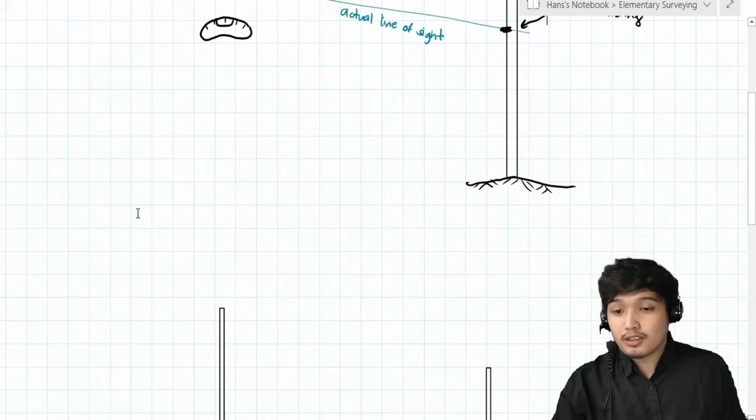There are two ways to do this two-peg test. So let's say we have 2 points, A and B. This is our first setup.

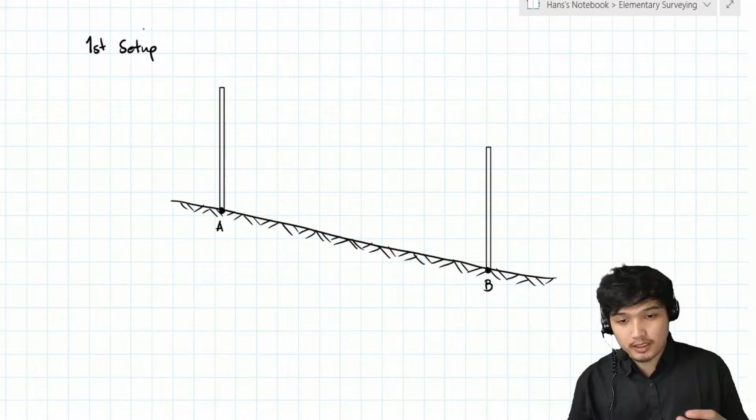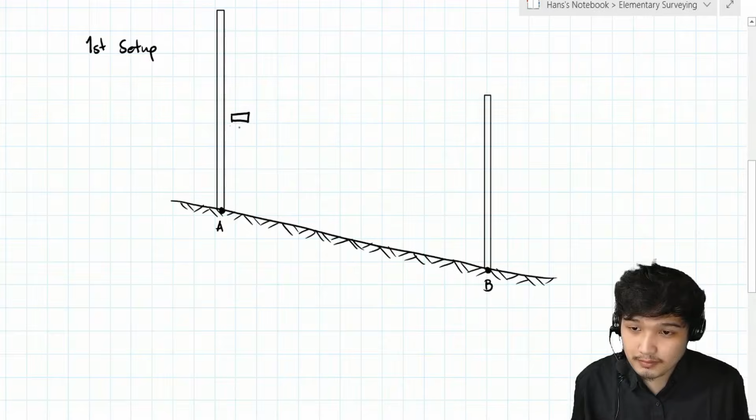In the first setup, the instrument will be positioned at two different locations: one at a distance near A and the other at a point near B. So let's say for example, this is our instrument, let's place it near A. Then, as we said, we do everything to make sure the line of sight of the instrument is perfectly horizontal.

So this is what we expect to read at the rod at A and then the rod at B, this is our expected reading. That's the thing though, because of the imperfection of the instrument, the line of sight is inclined by a certain angle theta. In this case, this is theta.

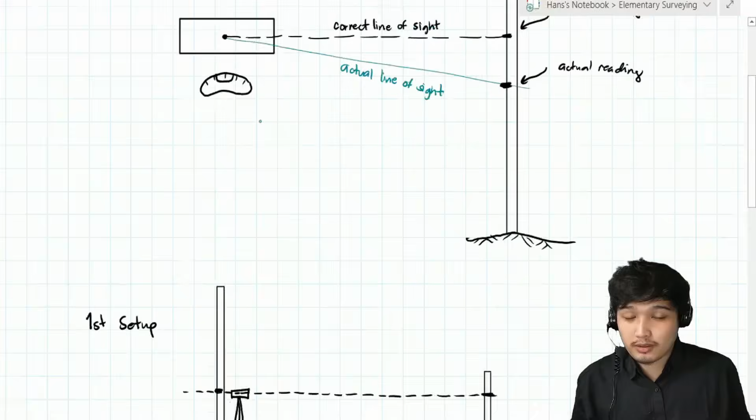That's very small though, so the error we encounter here is very small as well. The inclination can either be downward or upward, so let's just assume that the actual line of sight is inclined downwards by an angle theta.

So if we sight through the rod at A, this is what we measure, from the horizontal it's inclined by theta. Now, since the instrument is set up near A, if you notice, the reading at A will be almost equal to the correct reading.

So the actual reading in blue is almost equal to the correct reading using the broken line. So we can say that the error committed in the reading at A is approximately equal to 0 when the instrument is set up near A.

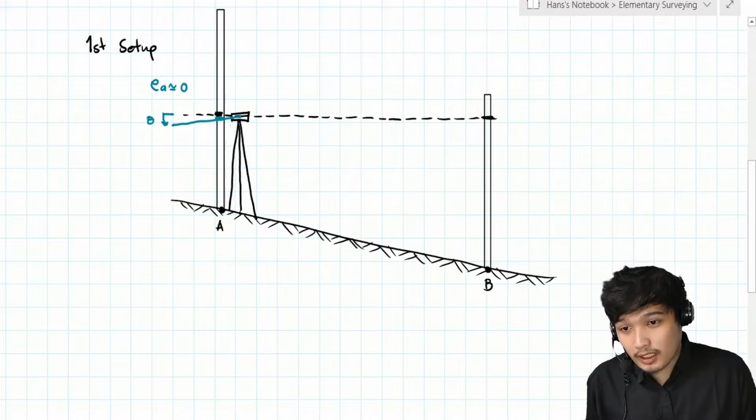So notice that from the correct reading, this is his actual reading. So he will commit a certain error. Let's call this his error at B. So with that, we can establish the relationship between angle theta and the error using the horizontal distance between A and B.

Let's say this is distance L. So approximately, from the instrument going to B, this is also L. So we can say that tangent of theta is equal to the error at B over the length L. That is when we set up the instrument near A.

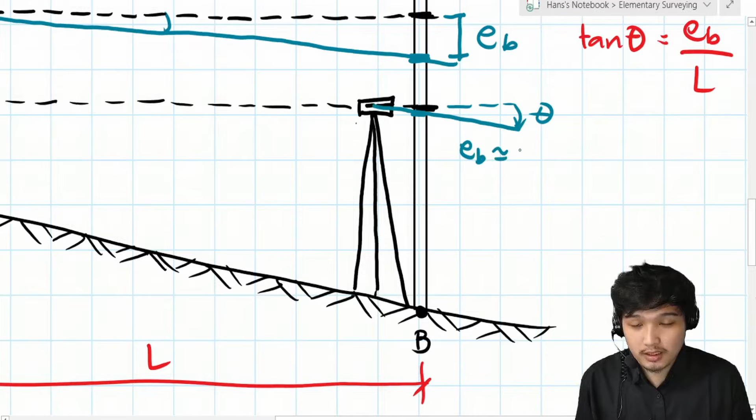So therefore, for the case where he is closer to B, the error committed at B is approximately equal to 0. While on the other hand...

He will sight point A, the rod at A. Because it's inclined by an angle theta, this is what he will read. So this is still theta.

So from the assumed correct reading at A, this is the actual reading at A. So he will commit an error, EA. Let's call this EA sub 1, EB sub 1, and this EB sub 2, EA sub 2.

Let's say this is the first setup, and this is the second setup. For the second setup, we can say the relationship, since this is still L, the relationship here is that tangent of theta is still equal to EA2 over the length L, since tangent theta equals opposite over adjacent.

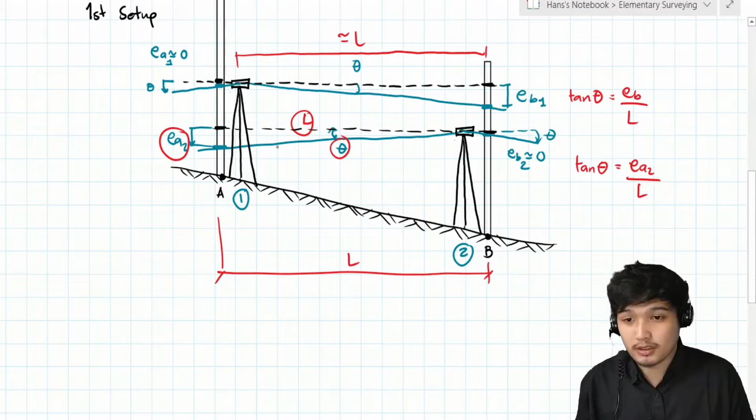Let's name this EB1. Since theta is the same, we can say EB1 over L is equal to EA2 over L, so we cancel. So we can say that the error at B at the first setup of the instrument is equal to the error at A at the second setup of the instrument. That is the relationship we can build which we will later use in our problem solving.

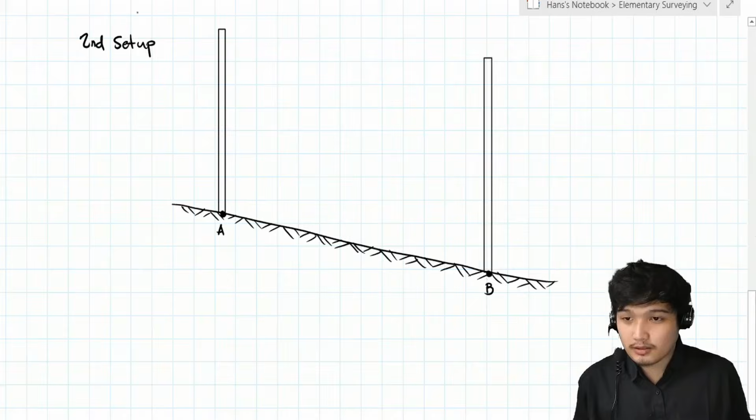So let's say for example the distance between A and B is L. Here, class, you don't need to memorize a formula because this is purely analytical. The discussion—if you understand how the two-peg test works, you won't need to memorize the formulas. So let's say this is distance L. The first instrument setup is placed exactly midway between A and B, so we place it here.

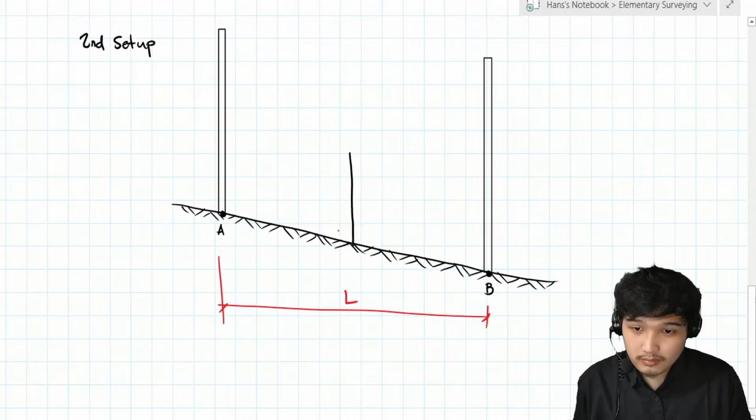Okay, so ayan. Ito yung correct horizontal line of sight. So dapat ito yung reading.

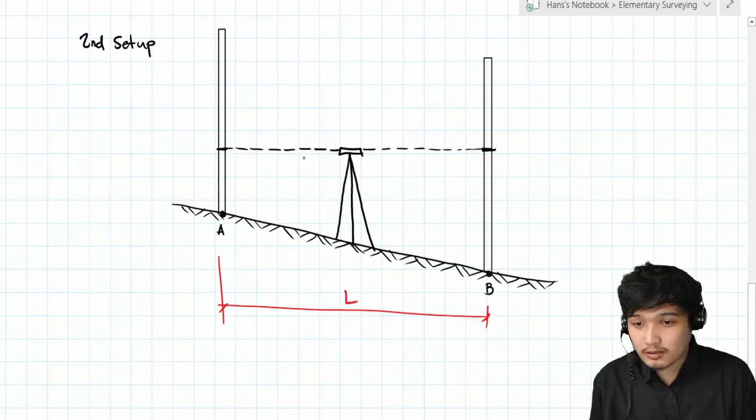Since the actual line of sight is inclined by an angle theta with respect sa horizontal, so kung mag-read siya sa A, ito yung mariread niya. Ayusin ko lang, ito yung theta, ito yung mariread. So therefore, ito yung error sa A sub 1 for the first instrument setup.

While for the B, using yung same instrument, ikot niya lang yan, inclined pa rin yan by theta with respect sa horizontal. Ito yung mariread niya sa B. So therefore, ito yung error niya sa B for the first instrument setup.

Theta. Ngayon, since nilagay natin siya exactly midway, so this one will become L over 2. So by tangent of theta, dito sa kabilang side, for the left side, tangent of theta is equal sa EA1 over L over 2. Dito sa kabila, tangent of theta is equal sa EB1 over L over 2.

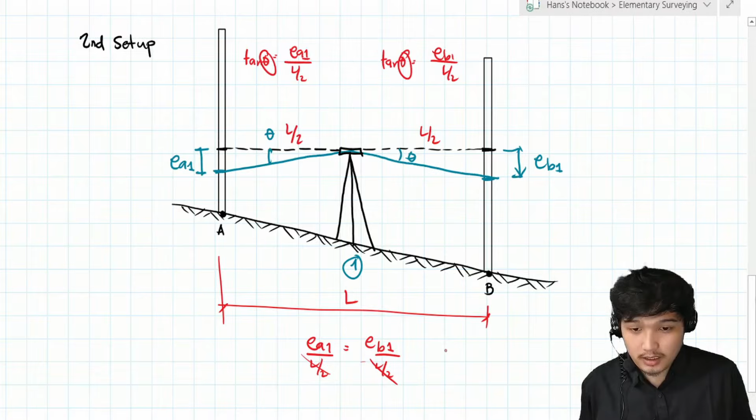Using yung relationship ng tangent of theta, since same theta lang yan, we can say that EA1 over L over 2 is equal sa EB1 over L over 2. Magka-cancel, so magiging EA1 is equal sa EB1. Yun yung first relationship natin.

So next, after ma-setup yung instrument midway between A and B, i-setup natin siya either dito sa likod ng A or sa likod ng B. Let's say dito siya ilalagay, sa continuation ng point A. Sinet up yung instrument behind point A.

So bibigay syempre yung distance na to, class, na with respect sa A. Or kung hindi man yan, basta magbibigay siya ng distance in order for us to locate yung position ng instrument. Let's say, class, ito is L1. Tawagin natin L1. Okay, so inaasahan natin na yung line of sight is horizontal.

Yun nga lang, class, dahil sa imperfection ulit ng instrument, so yung line of sight niya is inclined by an angle theta. So ito siya, so for A, ito yung correct reading, pero ito yung actual reading niya. So itong distance na yan ay tatawagin nating error sa A for setup number 2.

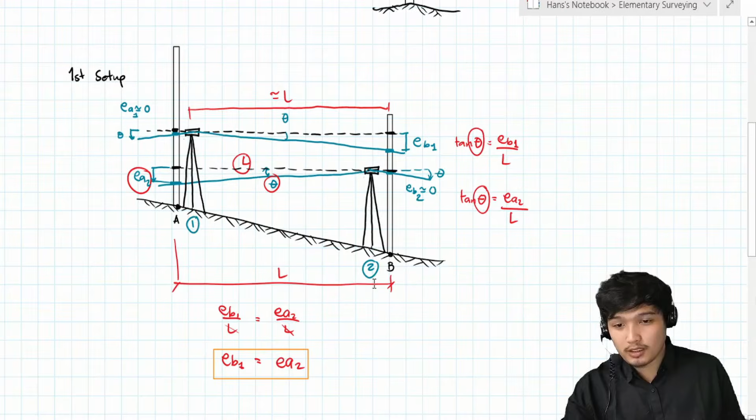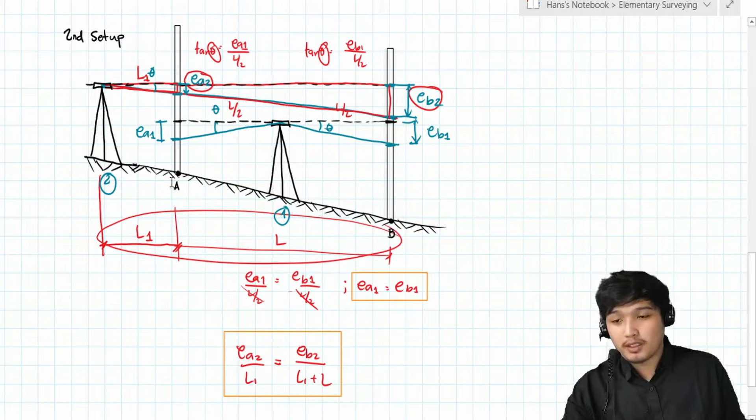So ito yung second possible setup, yung rod is set near sa point A or yung point B. So instrument setup 1, instrument setup 2, and then ito, so midway between setup 1 then setup 2, so somewhere along the extension ng point AB. So pwedeng behind A or behind B. So pwedeng ganun, basta ito yung relationship.

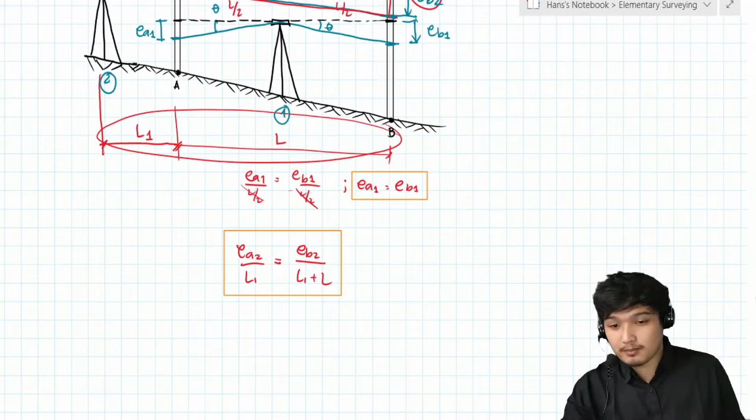So para mas magets natin siya, class, apply na natin siya sa ating sample problem. Okay, wait lang.

So situation 11 tayo, class. Sabi dito, in the two-peg test of a dumpy level, the following observations were taken. We have stations A and B, merong two instrument setups, that is near at A, saka near at B. So yung gagamitin natin, diniscuss natin kanina, is yung first setup.

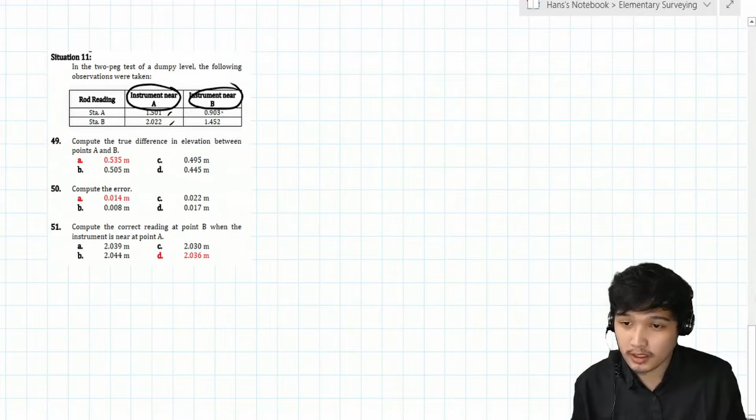Okay, so merong binigay na rod reading. Nung malapit siya sa A, so 1.5 and then 2.022. Near at B, 0.903 and then 1.452.

So class, determine or compute the true difference in elevation between A and B. Next, compute the error. And then lastly, compute the correct reading at point B when the instrument is near point A. So when it's near point A, what is the correct reading at B? Okay, let's solve that, class.

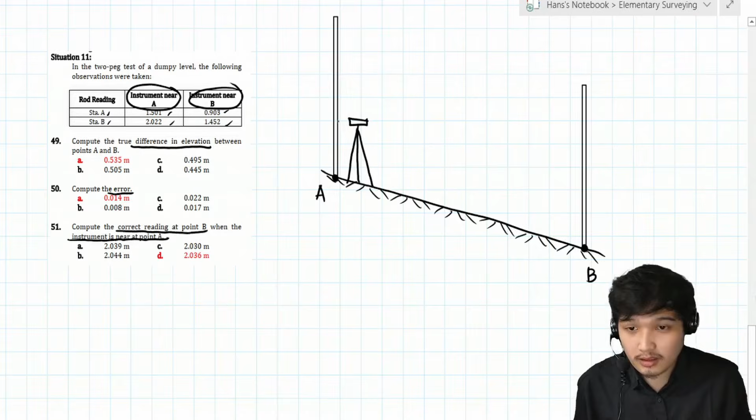So this is the correct line of sight, horizontal. This is what we should be reading, right? But because the line of sight is inclined at a certain angle, the question now is, what is the inclination of the line of sight? Is it inclined downward or upward?

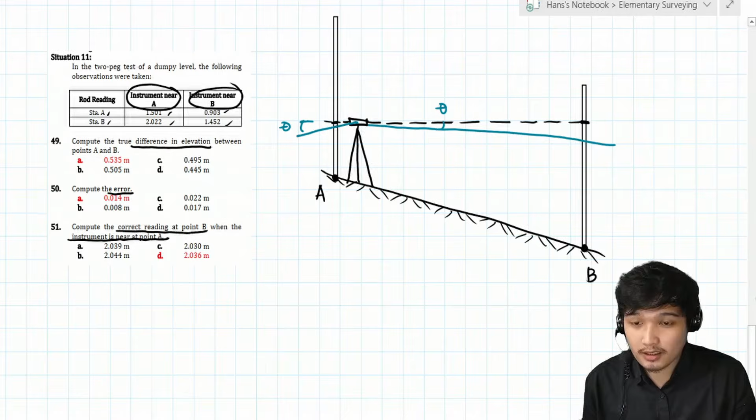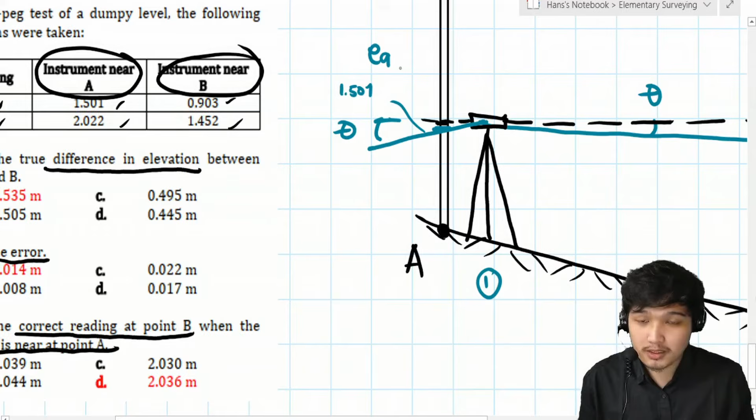Okay, so here, angle theta, and this one is angle theta too. So we can say that, now for the rod reading at A, what was read here, class? 1.501, right? So this one is 1.501, which we can say the error at A for the first instrument setup is approximately equal to 0.

While for the error at B, this is what was read. How much is this, class? 2.022. So this is the error at B, EB1. We don't have the answer for that yet. And given that the distance between A and B, the horizontal distance between A and B, is L. So L is here too, approximately equal to L.

So what was that again, class? Using L, theta, and EB1, we can say that tangent of theta equals EB1 over L. So we have two unknowns there, class.

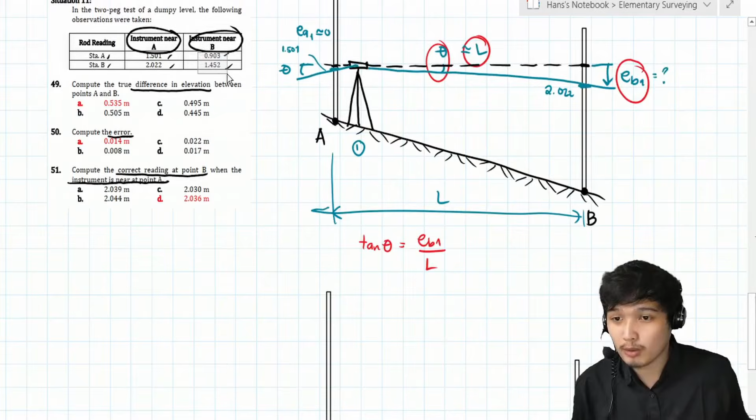So this is theta, again theta. So here's the reading, no correction here. How much is this? Reading at station B is 1.452. So this is 1.452.

Here, what was read is 0.903, with an error of this much, error A sub 2, which is unknown.

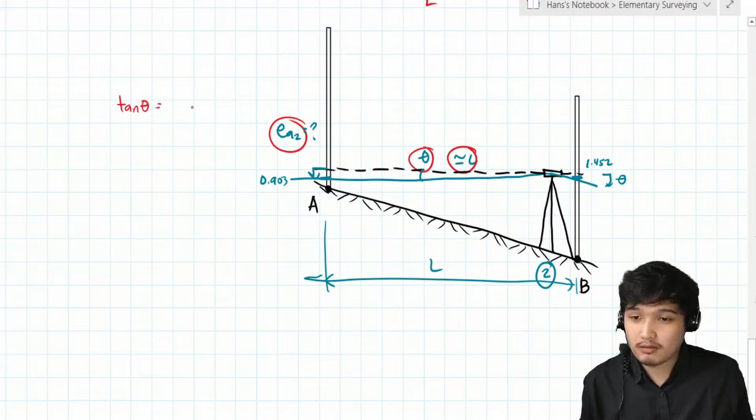Okay, so using trigonometric function, class, approximately equal to L. So this and this, so that tangent of theta equals EA2 over L.

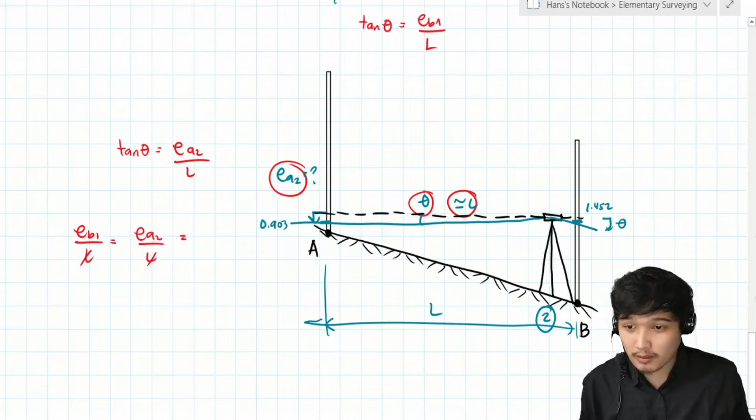Okay, so that's it. Let's go back to the relationship, class, EB1 over L equals EA2 over L. So we can say that the error is the same, right? We can just call it simply error E. Okay, so now, class, how do we solve what we're looking for? We haven't solved anything yet.

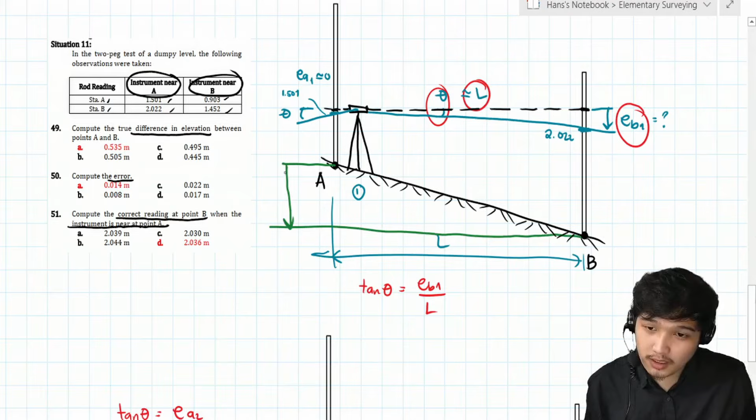is just look for lines parallel to that horizontal line, which is this, the horizontal line of sight. This one, class, okay, this is parallel to that horizontal line. So what we'll do, class, is take this height. How much is this, class? Isn't that 1.501? No, because there's no error, class. So, 1.501. Okay, how about the right side? How do we get that height, class?

Okay, paano kunin yung height na yan? So diba, etong mula sa reading papunta sa base, ito yung 2.022. How about ito? Ito yung error B1, no? So error B sub 1. So therefore, yung total height dyan sa right side is 2.022 and then plus yung EB1.

Dito sa left side, yung total height na ito, class, is H plus 1.501. So equate lang natin yan, class, no? Since same yung length niyan. So we can say that H plus 1.501 equals 2.022 and then plus EB1.

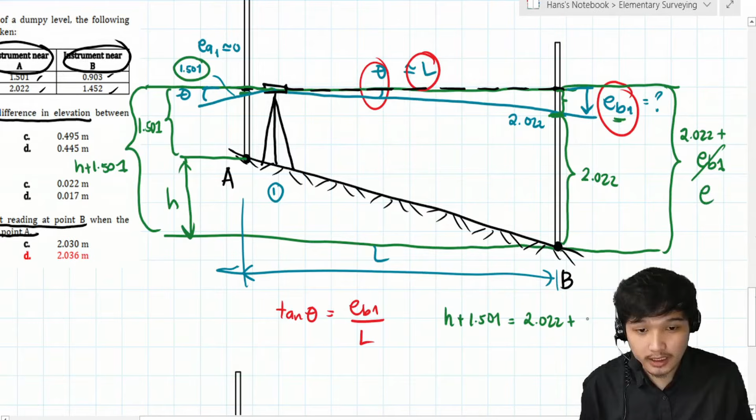Wherein etong EB1, di ba sabi natin, pwede na siyang i-consider as error E na lang, kasi nga same lang siya ng error sa second instrument setup. Okay, so nakagawa tayo, class, ng equation. Tawagin natin ito as equation 1.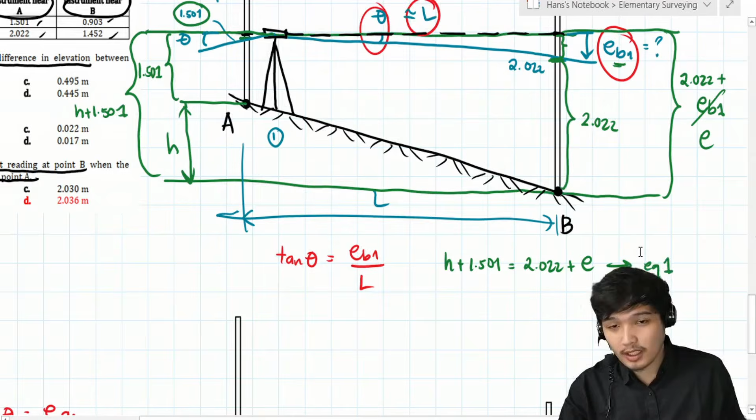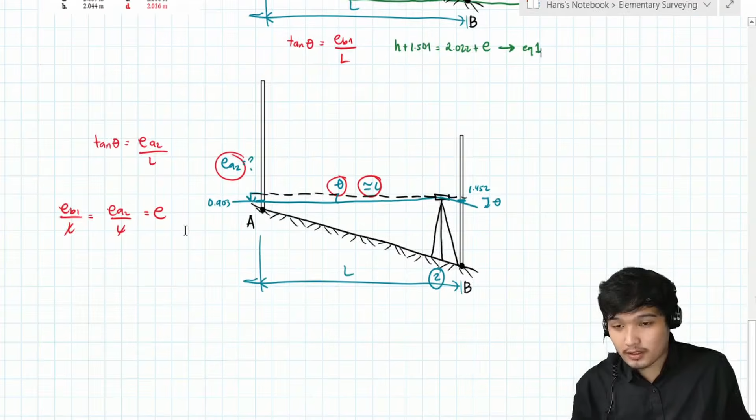So next, yung second equation, class, kukunin natin dito sa relationship ng height H sa anong error using yung setup number 2. Okay, so paano yan, class? Zoom in lang natin.

So again, ito pa rin yun, class, no? Ito, from A papunta sa B. So this one is the difference in elevation na H. Okay, zoom in pa natin further.

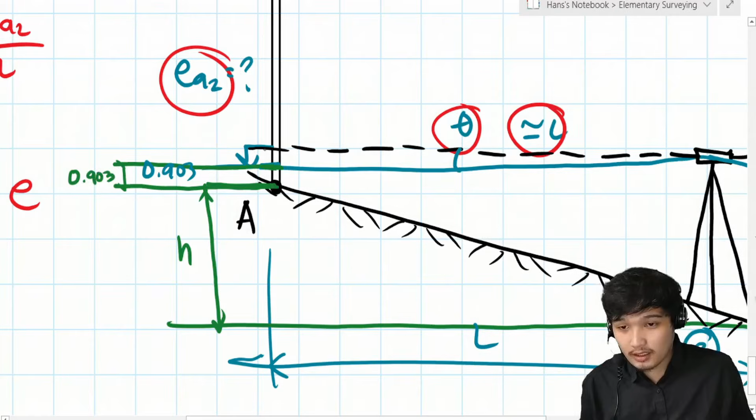So mula dun sa actual reading, tama, then papunta dun sa base. So this one is, ito nga yung 0.903, yun yung reading niya. At saka di ba ang gagawin natin, class, i-consider natin tong horizontal line of sight na to.

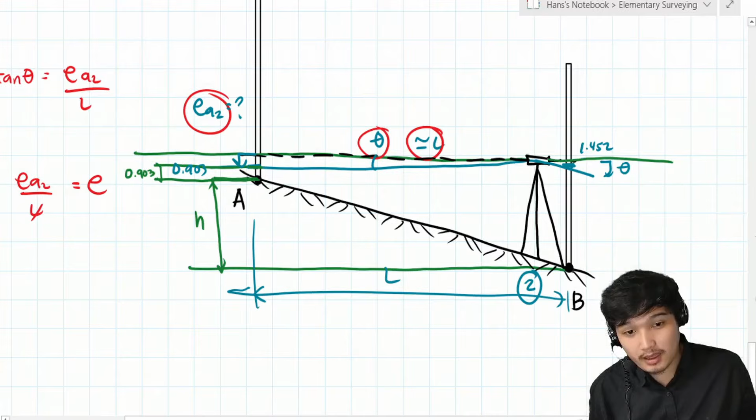So hindi ko pa pala napakita. Consider natin tong horizontal line of sight na yan para maka-generate tayo ng parallel lines. Okay, so balik tayo dito. So 0.903 ito, mula dun sa reading, papunta sa base. Next, from dun sa correct line of sight, papunta dun sa reading. Di ba ito yun, class?

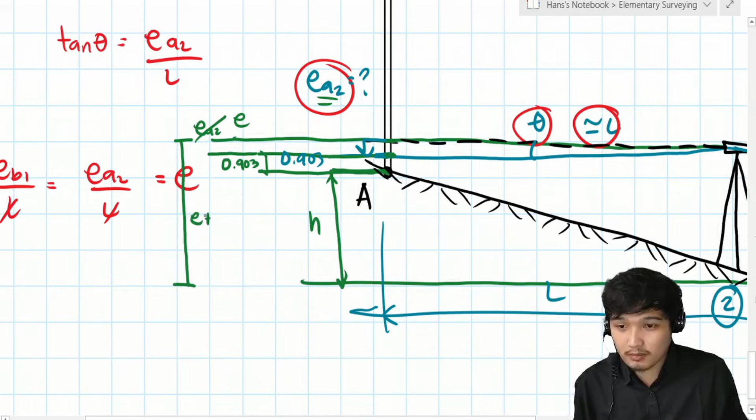Ayan, ilan yan? Di ba yan yung error? Etong error sa A2, which is pwede nga nating tawagin as error E na lang. So ibig sabihin, class, we can say that yung total height mula dun sa horizontal line of sight papunta dun sa horizontal line of B is what? Yung error E plus 0.903 and then plus H.

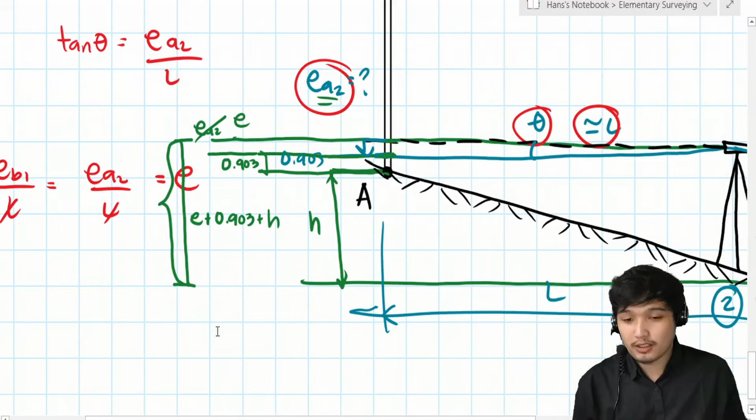Okay, sana na-gets, class. Punta tayo dun sa right side. So using yung mga dimension dito sa right side. Di ba ito yung reading, which is almost the same na dun sa horizontal line of sight. So ibig sabihin, reading papunta sa base, ito simply 1.452. So gets ba yun, class?

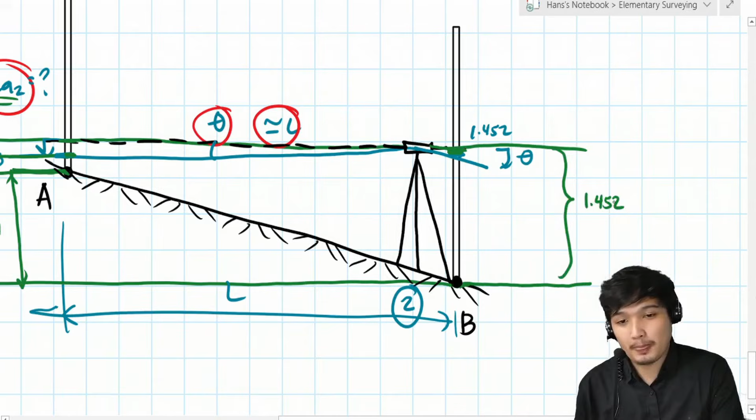No? Lagay ko nga, hindi ko pala nalagay dito kanina, no, na yung error dito sa B for setup of instrument number 2 is approximately 0. Diba? So anyways, may ma-generate ulit tayong equation relating yung H saka yung error E. So yung left side, which is ito, equal sa right side. So magiging E plus 0.903 and then plus H equals 1.452. So equation 2, so two equations two unknowns, class.

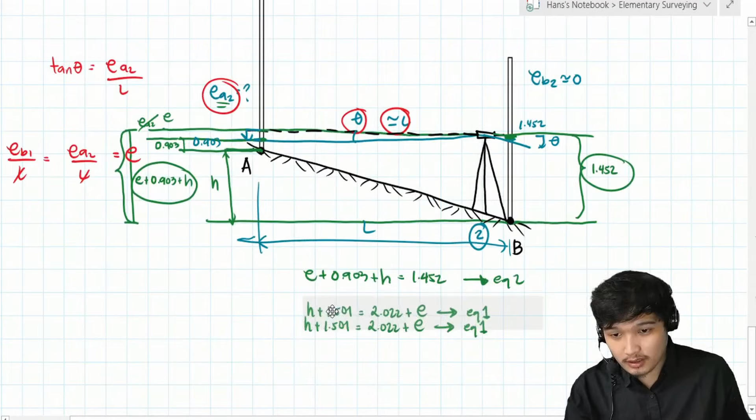Masosolve na natin yung H and then yung error E. So sige, class, kaya nyo na yan. Ilan ang H and then ilan ang E. Kapag ang E nag-negative, ibig sabihin, mali lang yung assumption natin, no, na inclined downward. So therefore, inclined upward pala siya. So sige, class, anong sagot?

Okay, so sumabas sa aking class that H equals 0.535 meters and then yung error is, ayan, positive, no? So therefore, tama yung assumption. Positive, 0.014 meters. Okay, so nasa choices ba yan, class? Okay, so that is A, correct? And A again, correct. So ayun siya, no?

So finally, class, masasolve na rin natin to. Compute the correct reading at point B when the instrument is near at A. So ang sinasabi niya, yung setup number 1. Okay, so for that case, asan ba yun? Diba ito yung setup 1 natin, class? So that, diba ito yung tinatanong, no? Correct reading. Ito yung correct reading at point B.

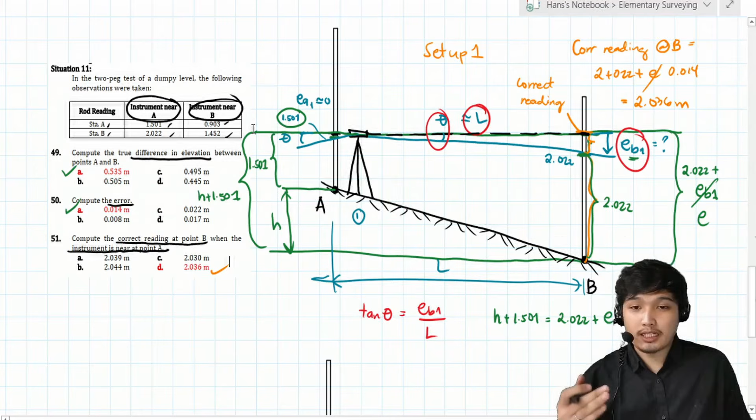Okay, so next tayo, class. So next problem. So wait lang.

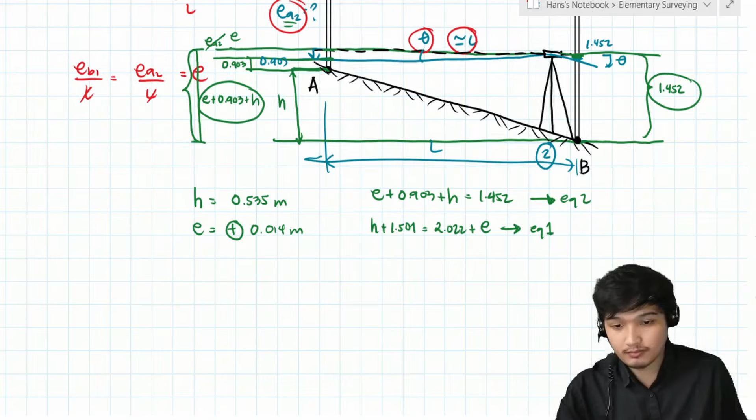Okay class, Situation 12. So in the two-peg test, the following notes were taken. Level at point 1, level at point 2. So where are point 1 and point 2 located, class? We have stations P and Q.

So it's said, class, that point 1 is on the line PQ and midway between P and Q. That means we have an idea that this is the example of setup number 2. So point 1 is midway between, and point 2 is 25 meters from P along the extension of line PQ, and 230 meters from Q, so that is behind point P.

That means this is setup number 2, class. So what's being asked is the true difference in elevation, and the correct reading at Q when the instrument is at point 2. Okay, so let's analyze this first, class.

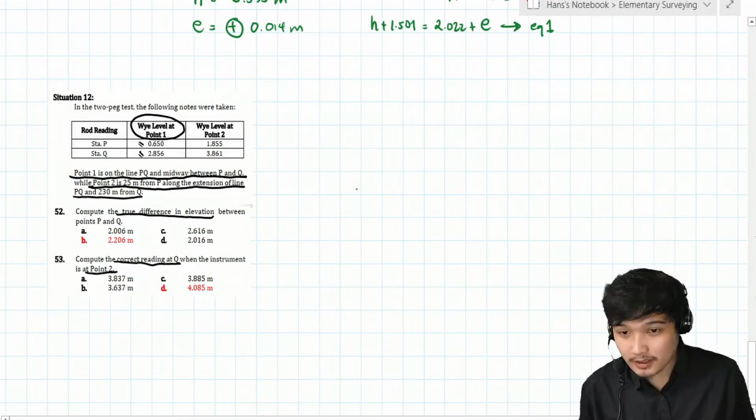So when the instrument is between P and Q, which is this, we can see that the reading at P is smaller compared to Q. So again, let's imagine that P is higher than Q. So let's say, this is it.

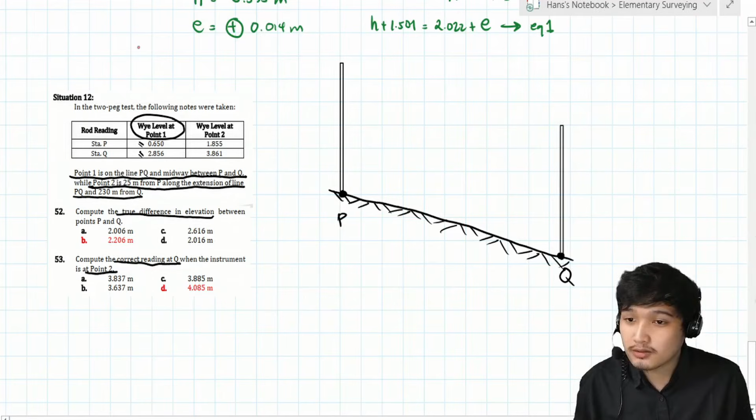Okay, so this is P, and this is Q. Let's place a rod at P, and then a rod at Q. Okay, and then this is the instrument. So let's say the distance between P and Q, the horizontal distance, is

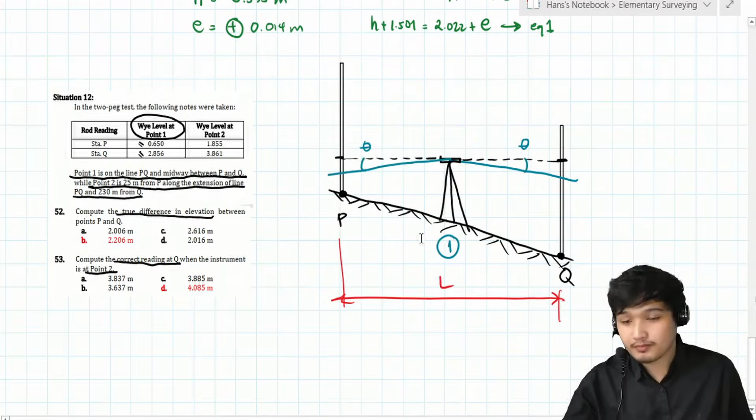So as a basic assumption, let's just assume it's inclined downward. So it's inclined by angle theta. So theta. This is instrument setup 1.

So with that, what did it read, class? At P, the reading is 0.650. So, 0.650. And at Q, what it measured is 2.856. So therefore, this is the error at A for instrument setup 1, which is unknown. And then this is the error at B for instrument setup 1, which is also unknown.

So with that, this one is L over 2, and this one is L over 2. So let's use similar triangles, class, since the sides are parallel and the angles are the same. So the triangle on the left is equal to the triangle on the right. So using similar triangles, ratio and proportion, we get EA1 over L over 2 equals EB1 over L over 2.

So we cancel, giving us the first relationship: EA1 equals EB1. Okay, so we can call this error 1, since it's for instrument setup 1. So next, let's move on to the next setup of the instrument. Wait, class, let me copy this.

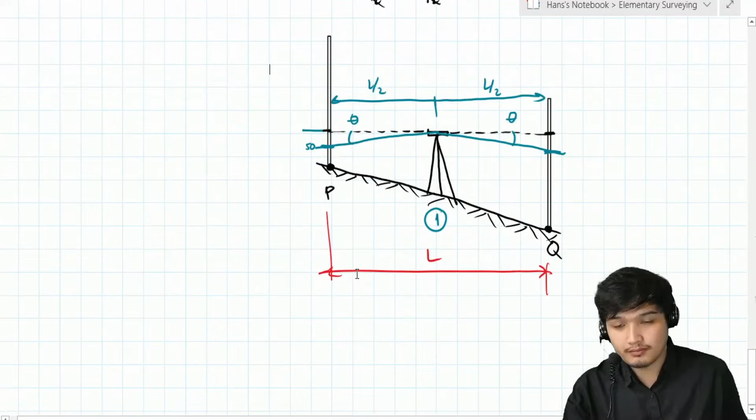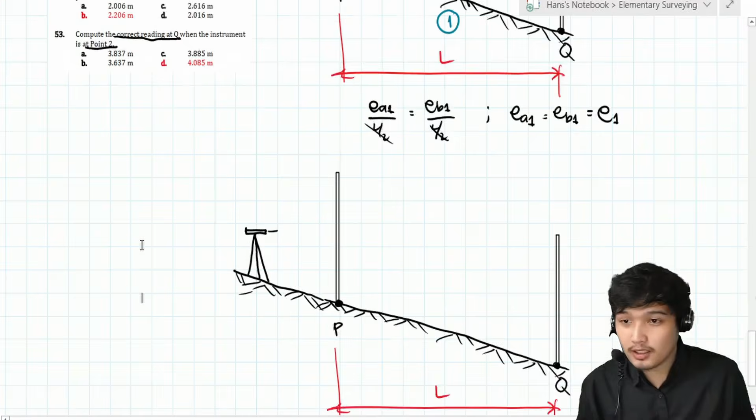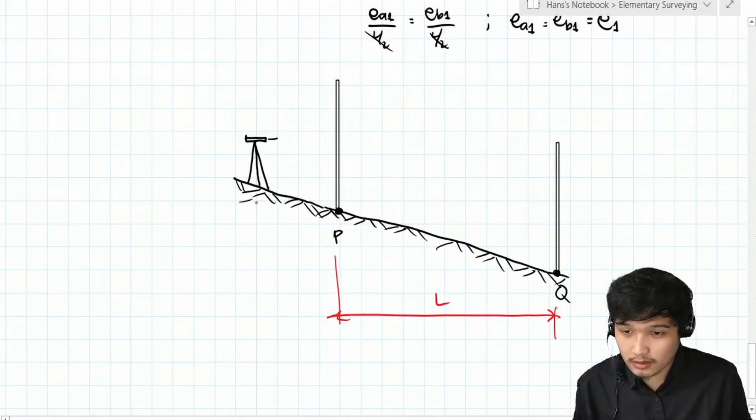Okay, so it's said that point 2 is 25 meters from P and 230 meters from Q. So it's like this, class. It's closer to P. So the distance going to P is 25. And then going to Q, that is 230 meters.

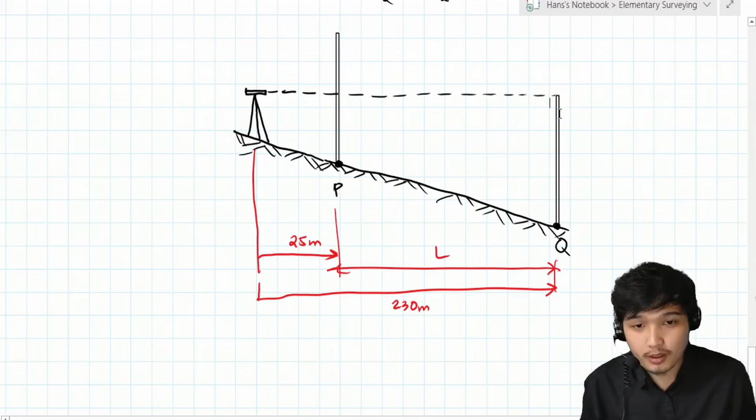Okay so again, let's analyze this. So this is the correct line of sight, ideally. Okay, let me extend this so it can get a reading. So let's say it's like this, and that's the correct line of sight. But since from our previous assumption it's inclined downward, therefore the reading is like this. So, what reading did it get here, and here?

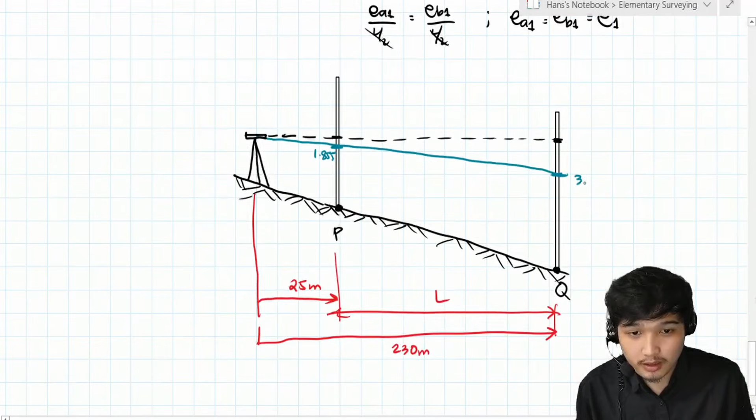What's the reading at P? 1.855. So this is 1.855, and then 3.861. So this is 3.861. So the corresponding error here, class, this is error at A for instrument setup 2, which is unknown. I'll name this 2. And then here, the error is this: error at B for instrument setup 2, which is also unknown.

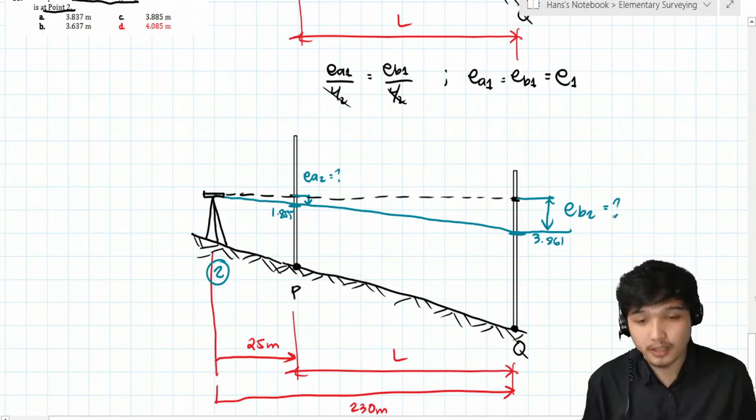Okay, so by similar triangles again. So this is one triangle, and then considering the big triangle. Okay, let me write here, class, so that the height of the small triangle is EA2, and its base is 25, class, right? So over 25 meters equals the big triangle, which is EB2 over its length, which is 230.

So, 230. So therefore, we now have a relationship between the two errors. So we can say that error A sub 2 is 25 over 230 of EB sub 2. So there, class, our unknowns are increasing.

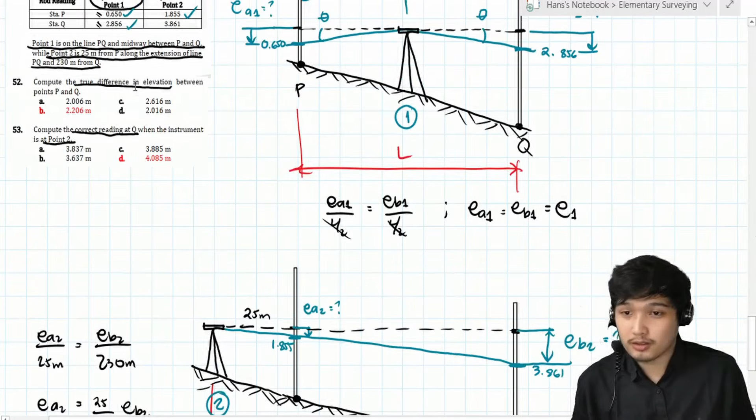So what's being asked first is the true difference in elevation. So same technique we used in the previous problem. So what we do is analyze this from above first. Project P, and then project Q. So this is the difference in elevation, H. So what we'll do is project the horizontal line from the instrument, horizontally. And then this, also horizontally.

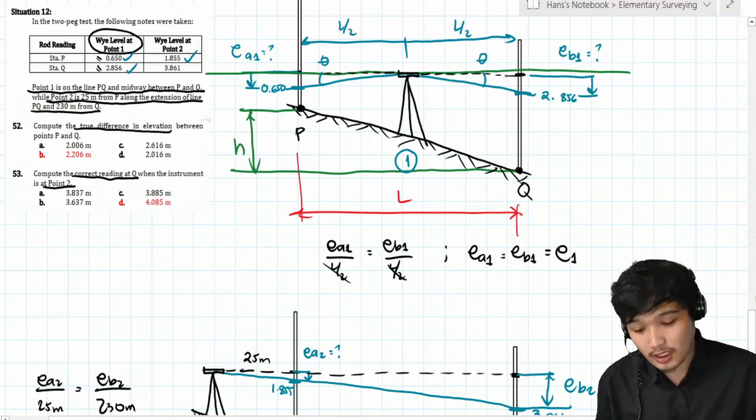So, extend ko lang to dito, class. Kukunin ko lang yung total height na to, para maging equal sa total height sa right side. Zoom in muna tayo dito, class.

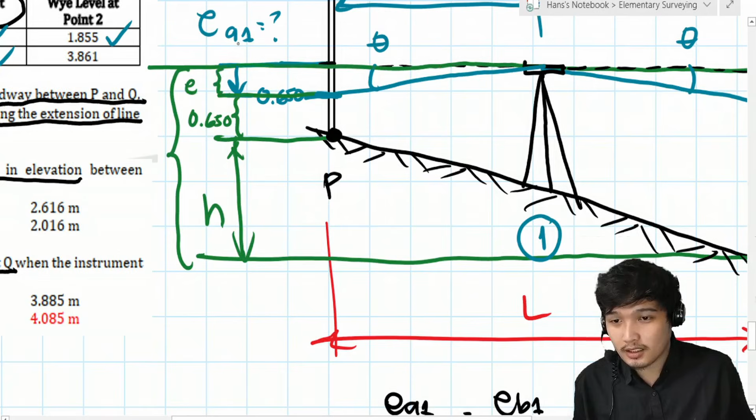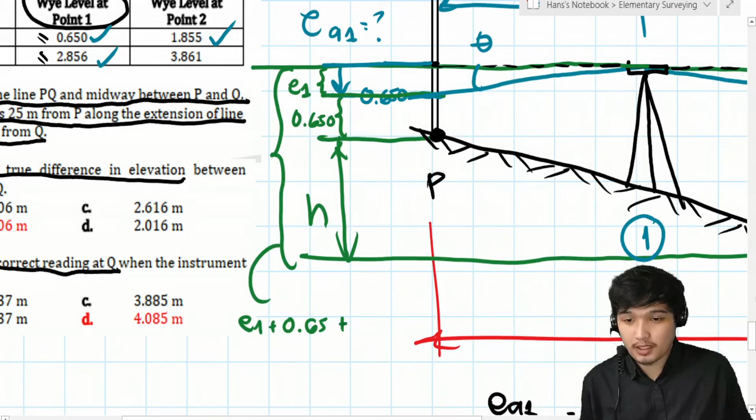So, from the reading papunta dun sa base, ito is 0.65. At etong dito, ito yung error, EA sub 1. Pero dahil sinabi natin dito na siya, ito na siya, E1 na lang. So lagay ko na lang siya as E1. Therefore, yung total height is E1 plus 0.65 plus H. Yun na yung total height sa left side.

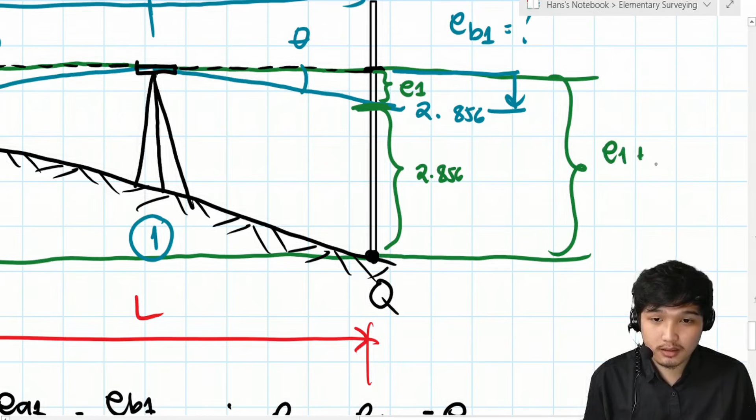So how about dito sa right side, class? From the actual measurement papuntang base, sabi ito is 2.856, at ito ay yung kino-consider as EB1, which is E1. So therefore, the total height is E1 plus 2.856. So with that, we can say that the height on the left side, E1 plus 0.65 plus H, equals E1 plus 2.856. Makikita nyo dito class, sa setup na ito, cancelable na yung E1.

So directly, class, masasolve natin yung difference in elevation h. Ilan yan class? Okay, so that is 2.206 meters. So that is letter B.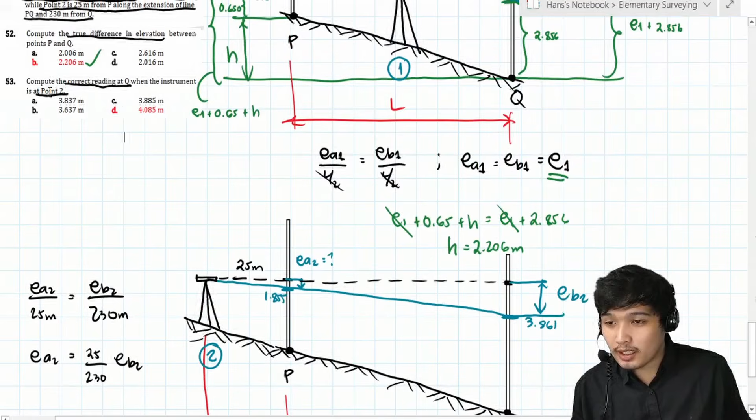Okay, so minasolve na tayo class. So next na tayo, dito tayo sa setup number 2. Kasi, ano ba yung tinatanong? Correct reading at Q when the instrument is at point 2. So kailangan talaga natin i-analyze to kasi ito yung point 2 class eh. Okay? So para malaman natin yung correct reading, kailangan malaman natin tong error.

Okay, so ayan, project natin to horizontally, yung P at yung Q. So ito yung height H, di ba, difference in elevation. Pero nasolve na natin yan as 2.206. So anong gagawin? From the instrument, project horizontally, yung horizontal projection from the instrument. So ito yun, let's say ayan, okay na yan.

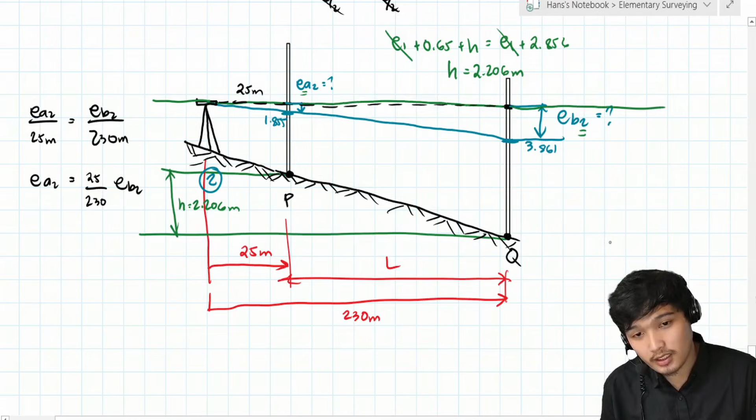Yan, at ito, extend ko lang. Okay, ngayon, consider natin yung at P. Okay, so itong height na ito, gusto ko itong kunin, class. Paano makukuha yung height na yan, class? So di ba, itong sa baba, ito na nga yung class eh, yung 2.206.

Zoom in natin further. So mula dito sa reading, papunta dun sa base, ito yung 1.855. At yung natitira dito na height, ito yung error sa A sub 2. So therefore, yung total height is what? 2.206 plus 1.855 plus error sa A sub 2.

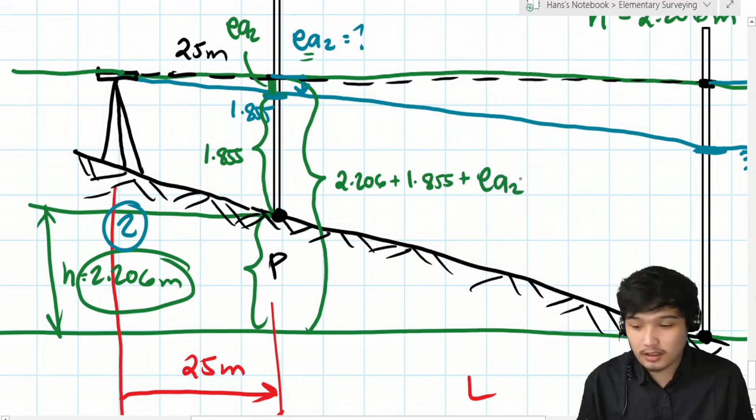Okay, at dun tayo sa right side, sa Q. So gusto natin makuha yung total height na to. Pero we know, from the actual reading papuntang base, ito is 3.861. Ito is yung error sa B sub 2. So therefore, total height is 3.861 plus EB sub 2.

So finally, mabigyan natin ng relationship yan, class. So that is 2.206 plus 1.855 plus EA2 equals 3.861 plus EB sub 2. So may dalawang unknowns dyan, class, di ba? Pero di ba nakapag-generate tayo kanina ng relationship ng errors.

So pwede natin palitan itong EA, palitan natin ito using yung relationship niya kanina. So magiging ano to, class? 2.206, 1.855, and then plus 25 over 230 of EB sub 2 equals 3.861, then plus EB sub 2. So therefore class, ayun na, malapit na tayo class, masolve na natin yung EB sub 2. So ilan yan?

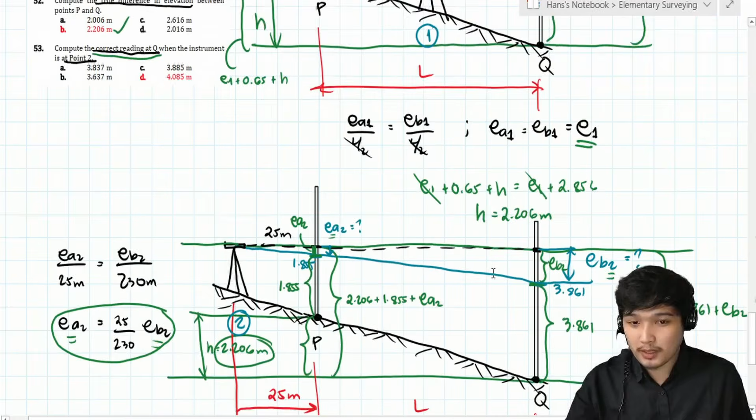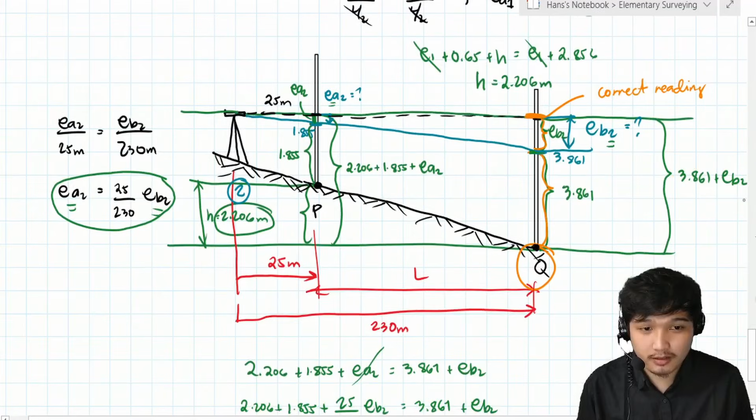So paano yung correct reading? Di ba sa figure natin, class, ito yung Q, so ito yung correct reading niya, di ba? So paano makuha yan, class? E di yung previous reading niya plus yung error, tama ba? Or itong height na to. So yung correct reading, susulat ko dito.

Correct reading at Q is equal sa 3.861 plus error sa B sub 2. So this one is equal sa 0.2244. So ilan yan, class?

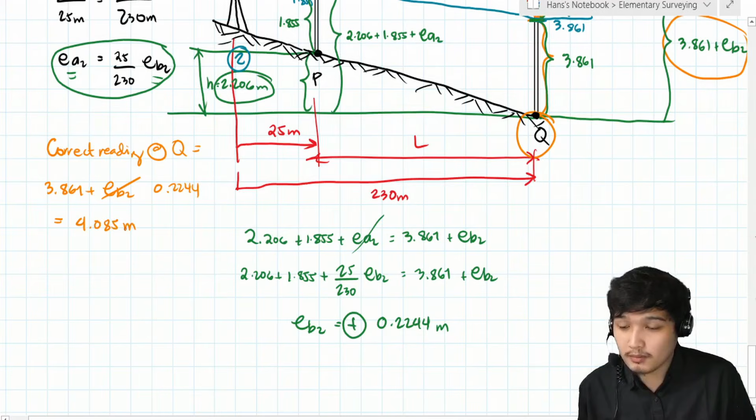Finally, may natapos na natin itong topic na to. So that is 4.085 meters. So that is what letter? Tama ba tayo? Yun, correct, no? Letter D.